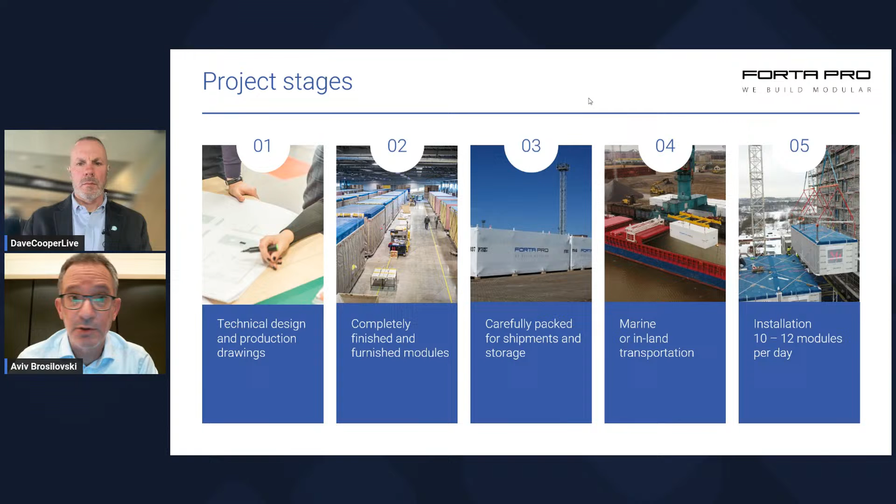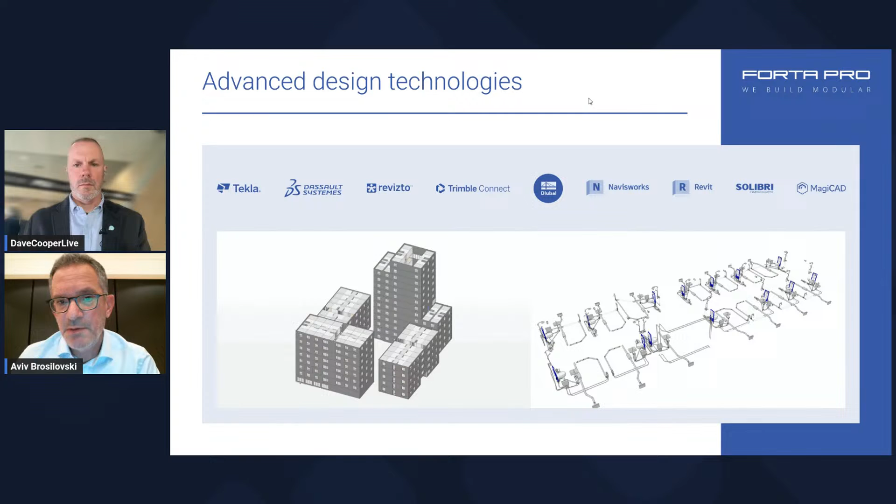We use the latest software. Everything is done in 3D from the very early stages - Revit, Tekla, all the MEP lines are being drawn as 3D elements from the very early start. So very, very successful in the software implementation as well.

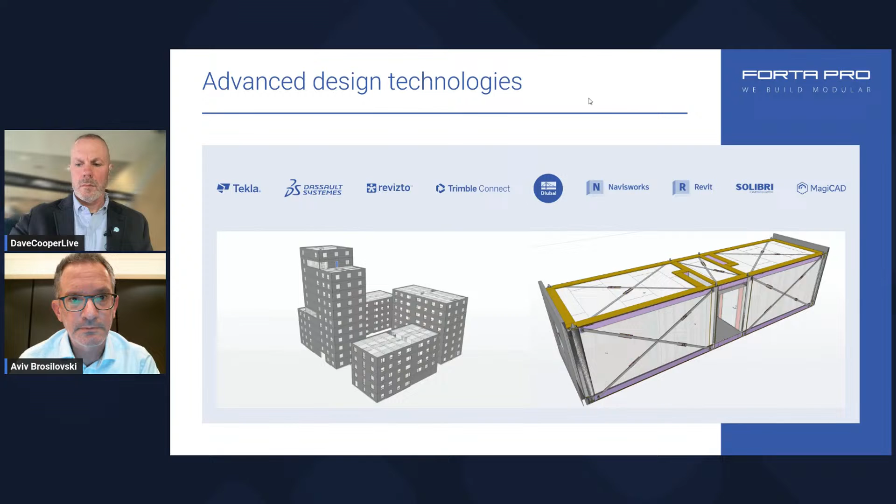The basic system is a steel frame. The steel frame allows us to go into high-rise buildings, a lot of advantages here - bolting system, lightweight. We can go in high-rise buildings, getting the stability that the building requires, as well as in seismic areas. We know how to deal with this, and we know how to design and build with our system.

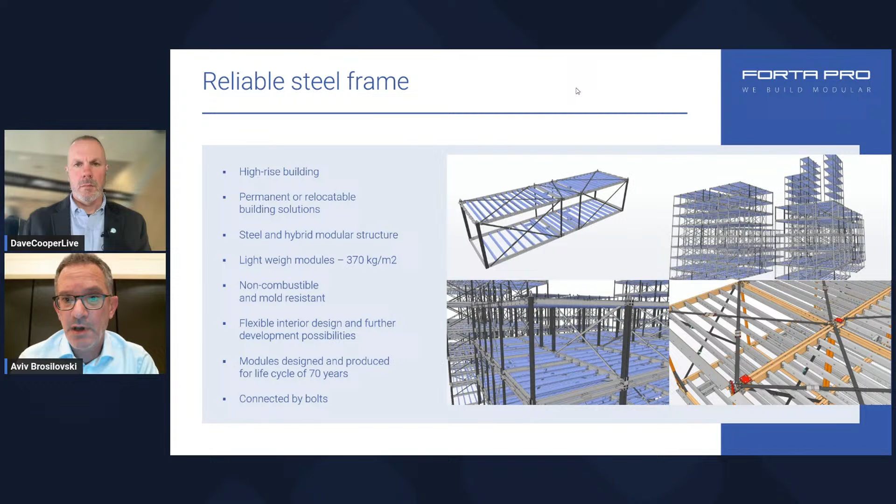If we look at the production, everything is done in the factory. Again, what I mentioned earlier, linear production line, built in stations - MEP, all the mechanical, electrical, and plumbing is being built into the module during its production on the line.

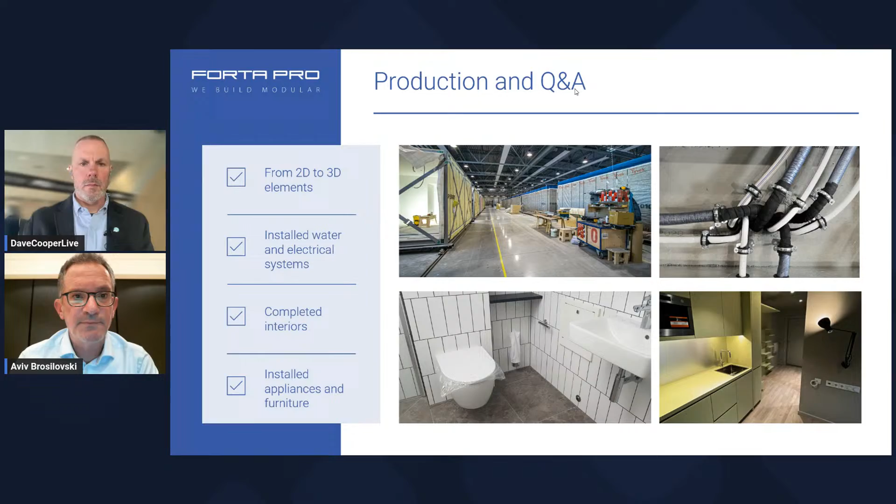Here you can see a short video clip of how the module arrives to site. The packing is being stripped off, and then it's lifted very carefully. There's a lot of know-how in the lifting process, then it's positioned into its location. You can see the environment is very tight, a living environment, but the installation process is very quick and very quiet. We're not disturbing the neighbors - a very quiet construction site, so a lot of advantages here.

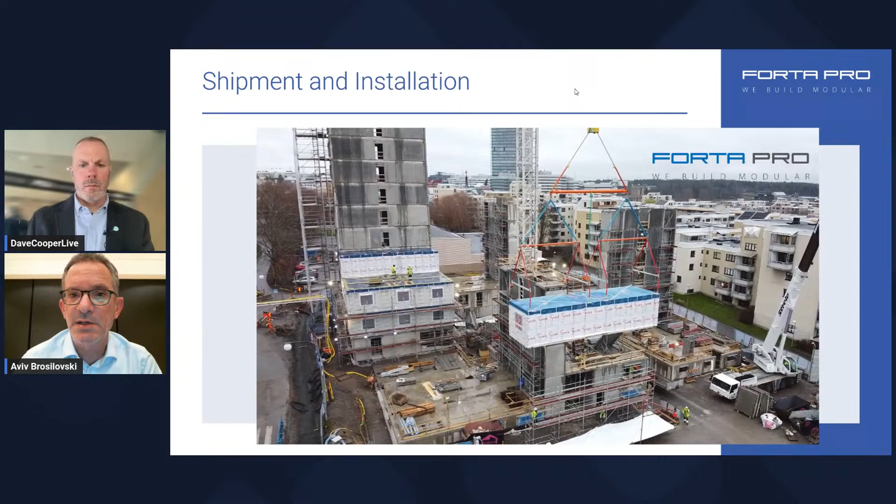Of course, we can do customized solutions as well, different types which we already completed. Dave, if I dive into a recent project, because I think this is what the audience wants to see - how buildings are being built.

One of our latest projects is this Unity Kista in Stockholm, Sweden - 4 buildings, rental apartments, including the tallest modular building in Scandinavia. Okay, it's not so high-rise, Scandinavia is not so high-rise, it's 16 floors.

Modular, and we now completed it and won an award for that, International Offsite Project of the Year in 2021. When you go inside, this is what you see - everything you see here was done in the factory, fully furnished apartments. These are rental apartments for young professionals, 25 to 35 years old, nice apartments, stylish design, Northern European design.

Unique about this is that Forta can also provide the communal areas as modules. So not just the box, not just the living room, but also communal areas where these young tenants can come in, hang out, drink a beer, work with their laptops, get together. Everything is modular and everything is done by Forta Pro.

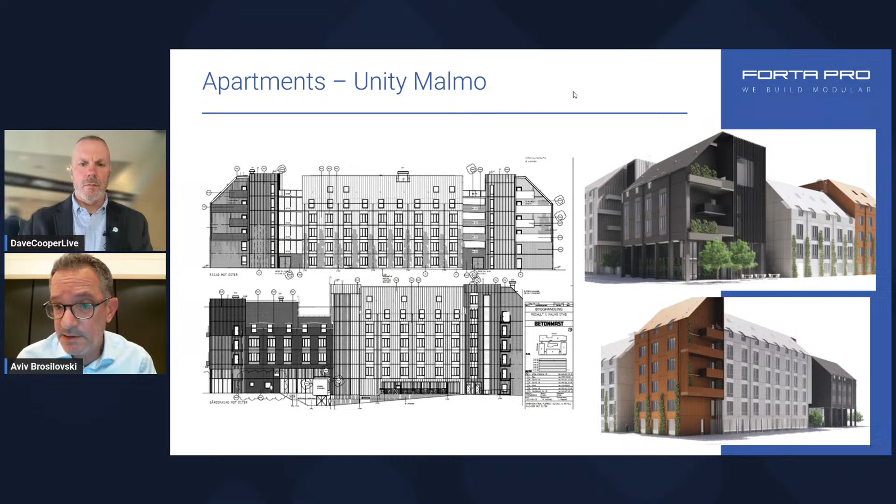So a second project is now being completed for the same client. Very challenging project, very challenging. You can see from this image that it's not your typical rectangle box. But the client pushed us, wanted us to deliver everything as modular, including the roof modules, and we did it. I think this is our next big success in this project.

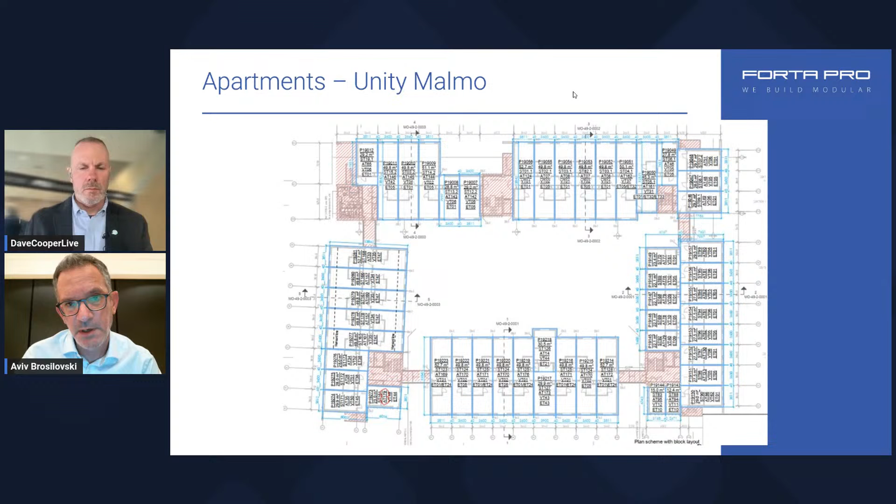About 10,000 square meters in these 5 buildings. You can see the layout here. The 5 buildings are connected, very unique design, connected with metal bridges between them, so you can actually roam between the 5 different buildings. Here on this slide, you can see the concept.

If you look at it from a modular construction point of view, not really modular, not rectangle, odd shape, sloped roof. The mechanical system, the heavy machinery sits on the roof. So we had a lot of challenges here, but we made it. You see how from concept, we can work with the design and we can work with the client. On the right, you see the finished result in the building.

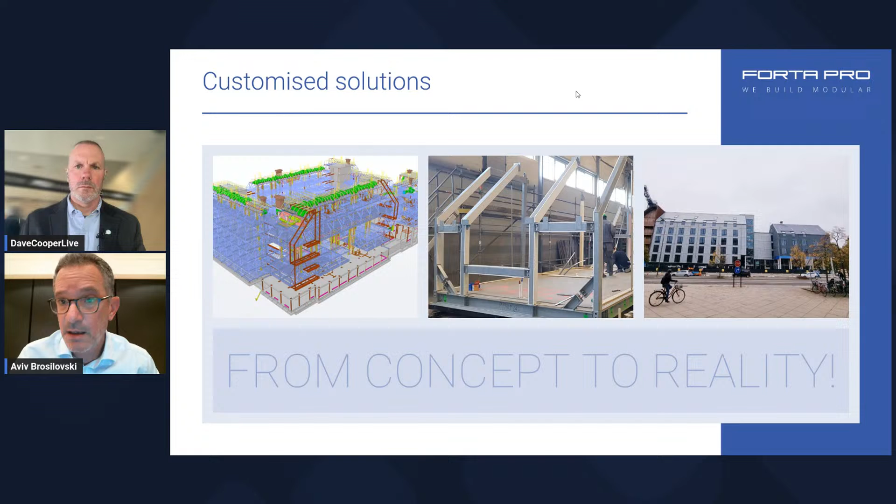And then videos are always fun, so let's see how we deliver. You see odd shape, different types of modules going on trucks, on ferries, and assembled on site.

The next video is a quick time lapse. I'll jump here, but just to show you how we work on site. Truck comes in with modules, see how fast, see how clean it's being done. The assembly team can work and do 10 to 15 modules per day, which is remarkable. This is about 750 square meters per day of completed modules.

Again, I'll jump here. Third floor. Interesting is the roof modules. You see them now being put on top of the standard modules. Sloped roof. Of course, the concrete core is being done on site by the main contractor, but this is being done while we produce the modules in the factory.

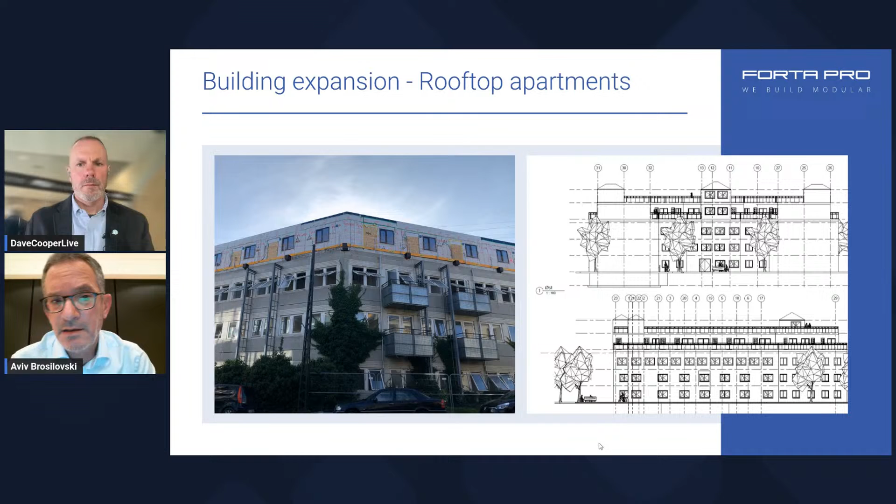Another interesting project which we completed, showing the advantages of modular with our system, is a rooftop extension. This was an existing building in Denmark. We added 24 apartments on top of the existing building without the tenants leaving their apartments. In 3 days, you have 24 apartments on top of the existing building without any reinforcement to the foundation or to the structure of the existing building.

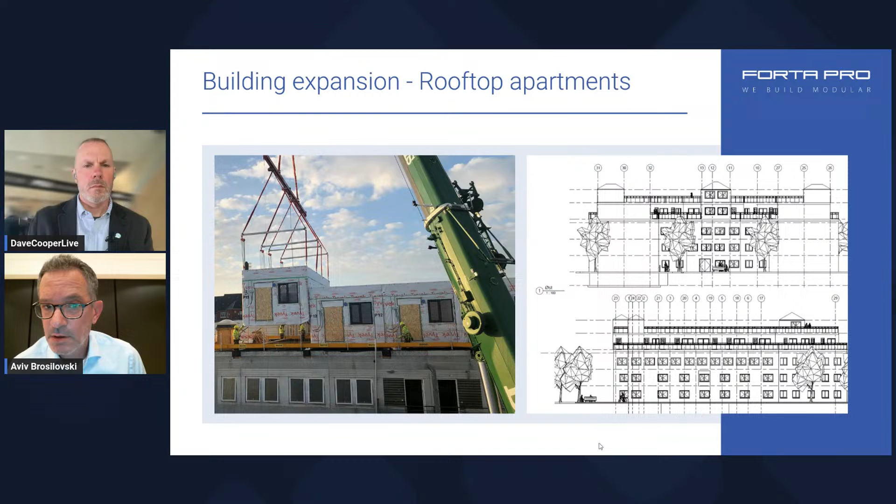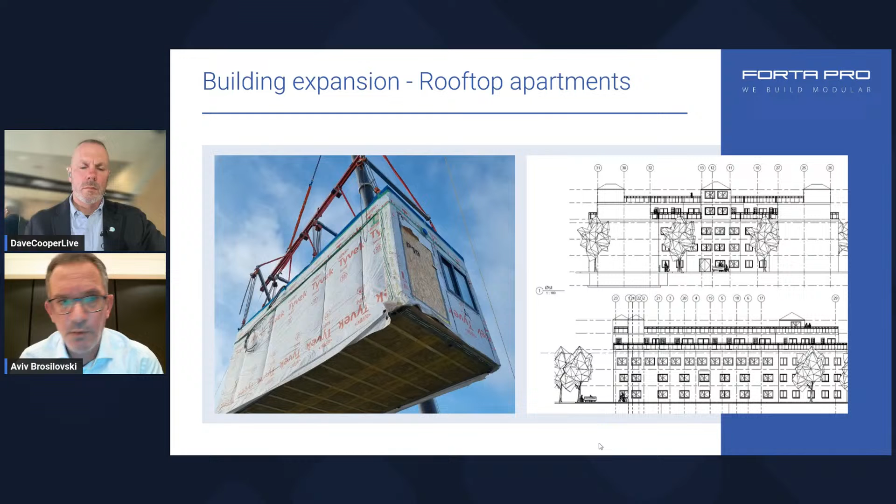The reason is that the modules weigh about 1/3 of traditional concrete construction, thus allowing you as a developer or as an owner to expand your buildings fast, quietly, clean, without the effort of going through a construction process.

Aviv, let me ask you something about the mechanicals. Are the mechanicals just prepped at the factory, or does each unit have its own separate mechanical system, and then you have a general core that runs through the building to supply power, gas, anything that's needed, electricity?

Well, of course, depending on the project itself, but typically all the piping, all the mechanical and electrical work is built into the module, and it's pulled outside of the module for connection in the shaft area or the corridor area. Once the module is assembled, we want to avoid as much as possible entry into the module itself, so we keep the connections outside, in the corridor area or in the core itself. But we've also delivered units completed with all the mechanical built in as a single unit, without any real connections on the exterior.

Got it. And if I may, I want to ask one more question regarding the set — watching that time-lapse video we just went through, how are the connections made when those are set? Do you have a locking mechanism built into the module, so when you stack one on top of the other, they're automatically connecting, or does somebody have to go back through and weld?